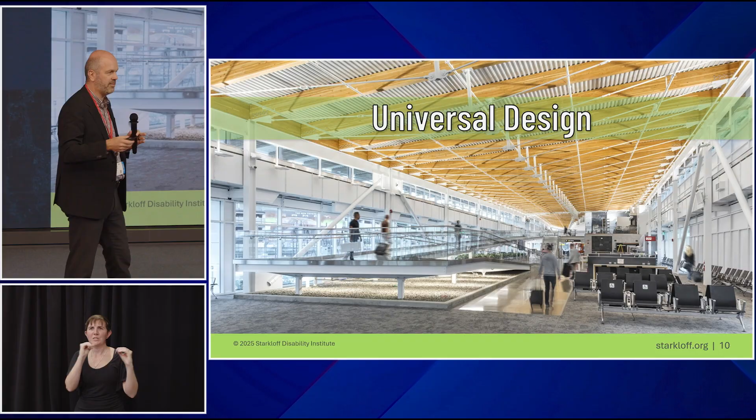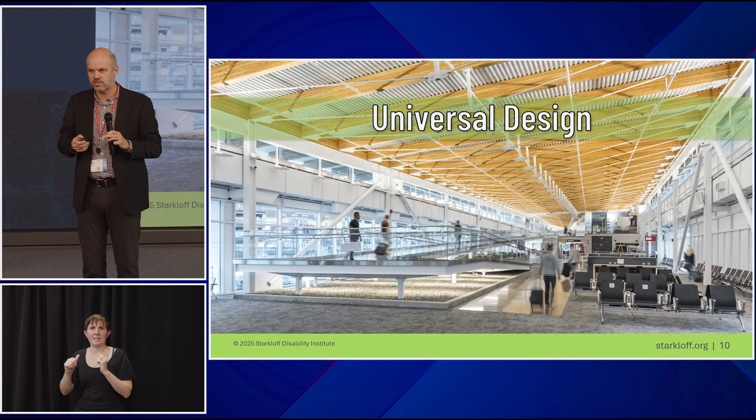But it feels a little bit like we're helping them by doing something extra. That's the bare minimum we want to do. So what we want to get to is universal design, where we treat everybody the same. There's no separate ramp for people to come into the building - there's a ramp that everybody can use. This is a project HOK did at SEATAC, the Seattle airport, and instead of putting in escalators and elevators, we just created this really long ramp with a very gentle slope that works for people with and without disabilities. Everybody is using the building the same way, everybody accesses it the same way.

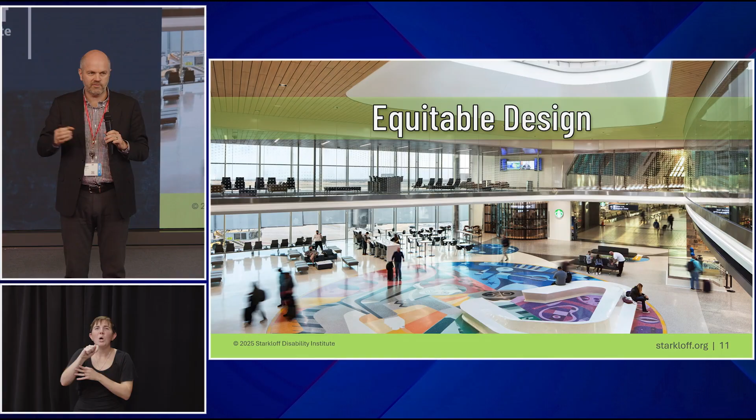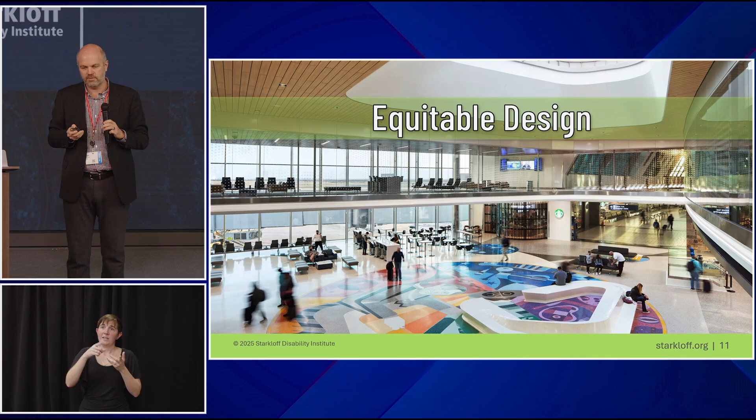And then finally, equitable design. Thinking about some of the disabilities or varieties of people that aren't necessarily noticeable, that aren't physical - we want to create spaces that are equally accessible for people from all backgrounds, abilities, and social and physical capabilities. This is an example where we'd use a variety of seating areas, colors, different levels of sensory input for people, so you can choose - you can use the building going through a quieter area, or through the middle with all that sensory input. Hopefully that puts universal design, and why we're here today, in perspective.

So neurodiversity is something HOK has spent quite a bit of time on. You may have heard Kay Sargent talk - she's got books out. It really applies to all sorts of building types. I'm thinking as an architect, so I'm focused on buildings, but you can obviously apply that to other forms of transportation, streetscapes, and things like that.

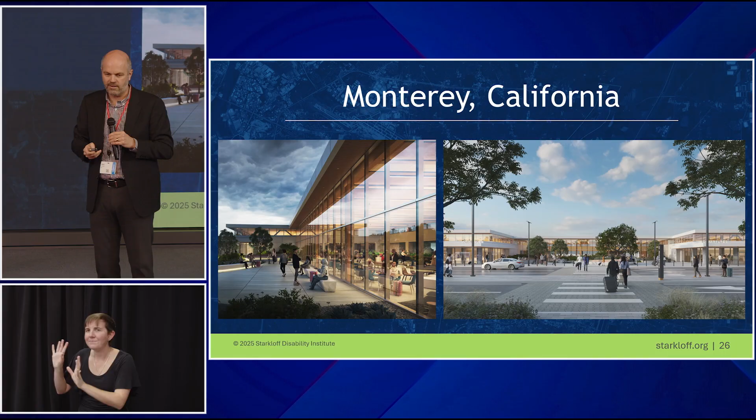There's only a curtain wall between the people that are on the land side, so haven't gone through security yet, might be waving their family goodbye, and the people that have already gone through security. So being able to come back and see your loved ones one more time before you get on the plane, that's great. We avoided any level changes, so no ups and downs, and integration of nature was very important both inside and outside, and we tried to extend that with mass timber in the building structure.

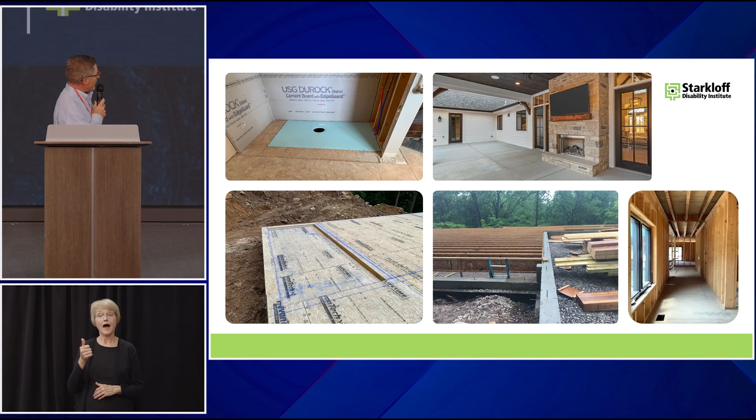Here's some other real world examples of the planning that goes into universal design. This bottom picture on the left, that's a subfloor, and when we're designing our homes, this is a zero entry shower, so we always drop the subfloor so that we can pour the sand and cement to create that shower and build it up even with the rest of the subfloor. Picture to the right of that, that's a perfect example of how we do zero entry at garages, at front doors. Basically, we pour the foundations taller so that the floor joists sit inside of the foundation wall. This allows us to pour the concrete slab up to the top of the foundation and even with your finished floor.

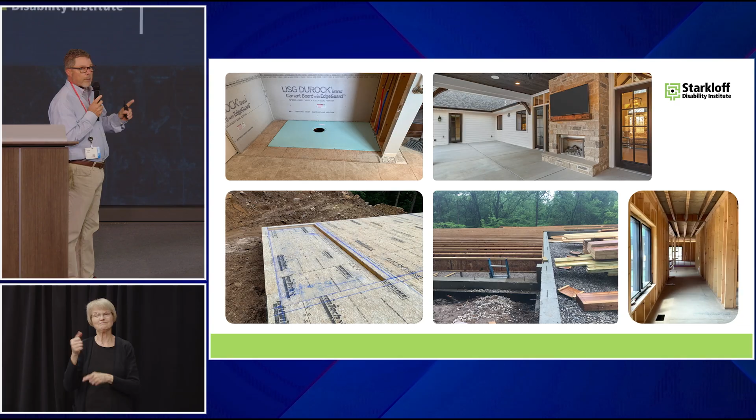To the right of that, just an example of a 4-foot hallway. Top right picture, great example of a rear patio. There's 3 doors there that all lead to the rear entertaining area, all zero entry. As a side note, Therma-Tru is a manufacturer of doors, and they make one of the best residential doors with ADA sills, so we try to use those as often as possible.

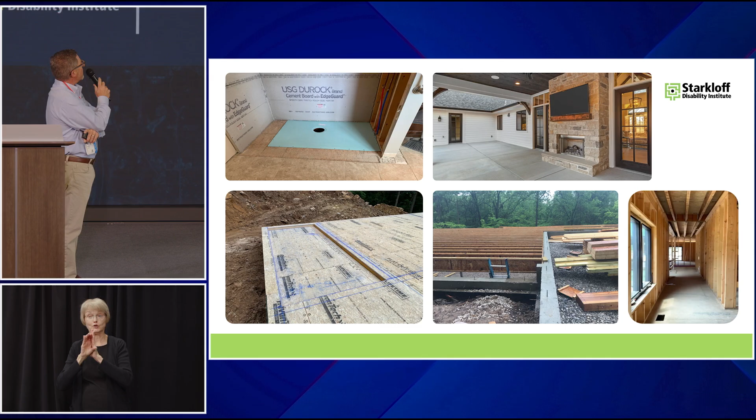And top left picture, this was just a small remodel, kitchen, bathroom, and all we did was the shower. So we didn't have the ability to drop the subfloor in this case, but there are products on the market that allow us to go in. We can take out the 3/4-inch thick plywood that's on top of the joist, and this preformed shower base sits right on top of the floor joist. We block around it, and then we can waterproof that and float that to create that zero entry shower.

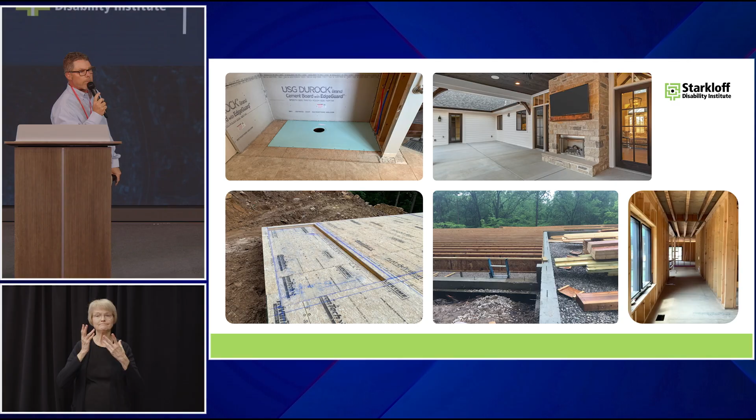Affordability and scalability. Affordability is a big topic in universal design, especially in the residential world. There's a lot of products out there that don't cost much more that are UD that we can use. Just some simple examples: lever handles versus doorknobs. A wider door is a couple dollars more than a narrower door. Taking a faucet in the bathroom or the kitchen and putting it off to the side of the sink instead of behind the sink - it's a simple move and it's much easier to access. Those are all good examples of not expensive items.

There are some items that are more expensive, such as the zero entry shower and zero entry doors where you're accessing from garage or front door where you're raising the foundation. But the whole point is you plan for it. So if you plan ahead and you do it up front, it's so much less expensive than when you have to do it at a later date.

Community impact - I want to touch on multi-generational and aging in place benefits. Multi-generational living has become very prominent for us anyway. We've done 2 multi-generational projects in the last 18 months, and we currently have one in design that is a 16-acre, 3-home multi-generational project. 3 families will be on this property. One of the gentlemen is in a wheelchair, he's paralyzed from the waist down, he's in a motorized chair, but he will be able to access every home, patios, front doors, garages of each home. We have paths going around the whole property that he'll be able to use. There's a pond on the property that he'll be able to get down to. So it's all about the planning to make this happen.

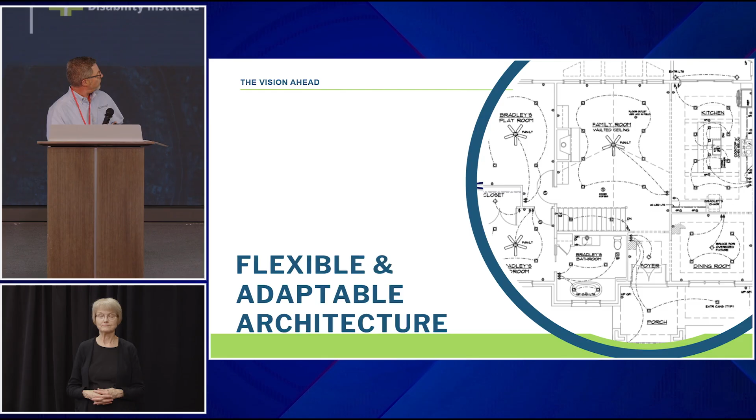Architects are designing flexible spaces, flex rooms, extra bedrooms that could be converted, or a dining room that could be converted for something else. I happened to be online today on Builder Magazine, and this is from today's Builder Magazine.

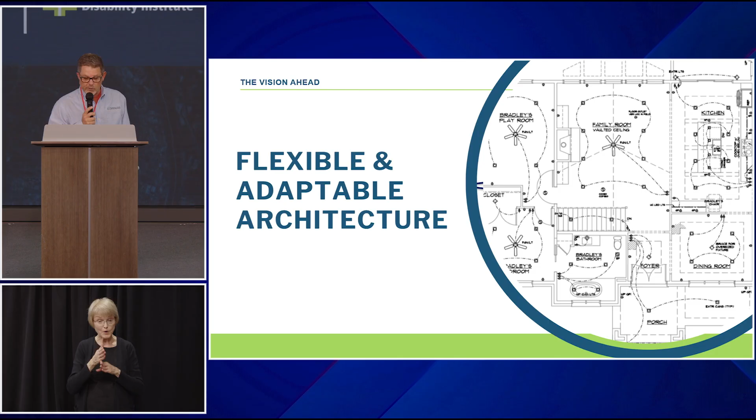Fewer bedrooms and dual primary suites. Bedrooms in new build floor plans are changing from count to configuration. Twenty years ago, about 75% of buyers wanted 4 bedrooms, 3 standard and 1 primary. Fast forward to today, and the majority, 55%, say they want 3 bedrooms, 2 primary bedrooms, and a standard bedroom. Having 2 primary suites is desirable for multi-generational and blended families or for long-term guests. So it's becoming a little bit more noticeable.

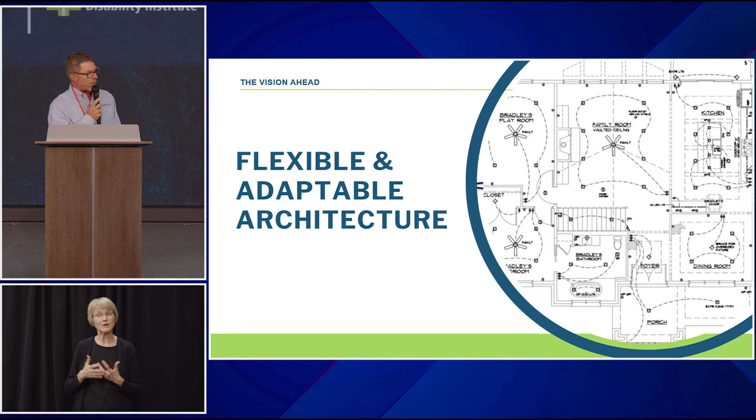Before I came today, I went on the IBS 2026 website. IBS is International Builder Show, that's in February of '26. It's a huge show for the home building industry. Unfortunately, there's only 3 speakers on universal design. But we just need to get out there, we need to continue promoting. We love Starkloff using their outreach to promote universal design and educate. Education is the biggest thing we can do.

Call to action. Builders and designers: integrate 1 or 2 small features in your next project. You'll find it's pretty simple once you just start learning a little bit about UD. Homeowners, as they're out looking at new homes they're looking to purchase, they can look at the home and get a feel for its adaptability for future use. Does it have a wide enough hallway? Are these doors big enough for a wheelchair?

Community leaders, that's the tough one. We need to educate them, get them to promote inclusive housing policies, maybe using tax incentives or some other idea. But in closing, we can start small, but we have to start now.

We get asked quite often about trends. What are the latest trends in home building, the latest colors and things? Well, universal design is not a trend. That's our future. Thank you.

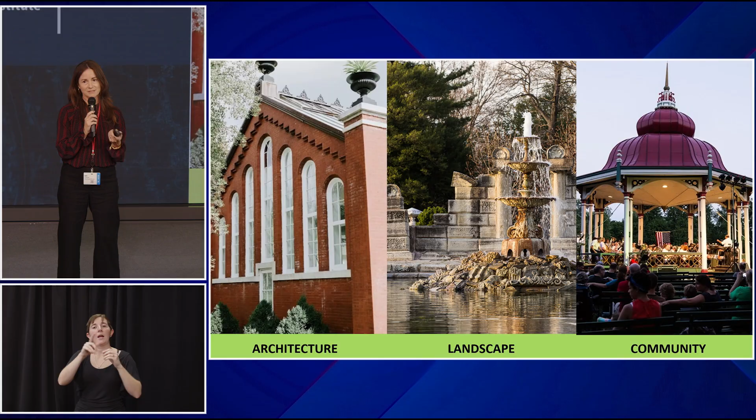I'm going to focus primarily on access and inclusivity. And then if we have a little bit of time, I'll touch on a couple details and the ways we're thinking about things, not on the broad scale, but down to every finite detail when it comes to universal design in the parks.

So first, access. This is a beautiful picture of one of, I think there are about 13 Victorian pavilions in Tower Grove Park. It is the world's greatest collection of Victorian pavilions anywhere in the world.

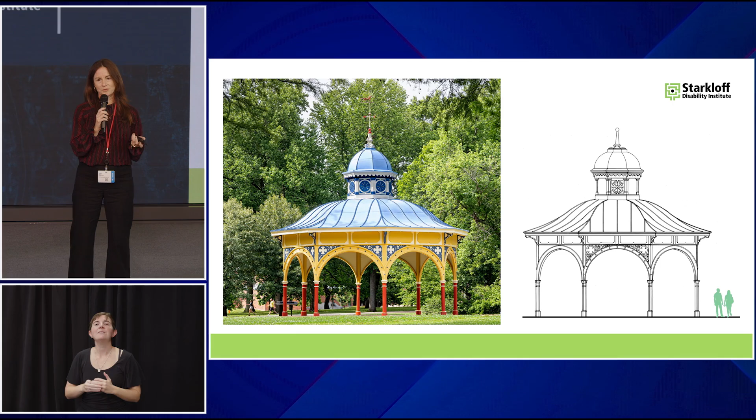So if you haven't been, you should check them out. We do have to focus on preservation when above grade, so we want it to look like it's always looked. We want to restore it to its original beauty. But at grade, we have a lot of ability to modernize, especially when it comes to accessibility and adaptability, and making sure everyone can experience these pavilions.

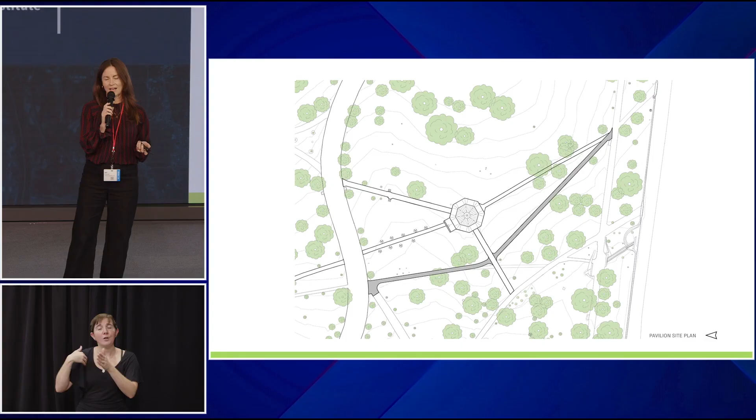So the first thing we look at is the paths. There are historic paths that we have to honor, but we also can add new paths. So we think about what is it like when you're at an event. Can you get to the pavilion for an event? And if there's an event happening, can you still enjoy your time in the park and get around it, maybe just looking at the pavilion? So we planned the paths.

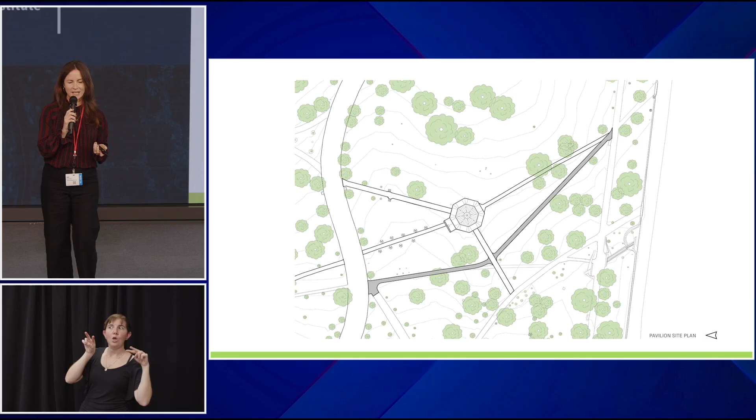So we worked with an accessibility consultant on our team. And with all of these projects, I should say, there's only money to do a couple at a time. So what we wanted to do with this project is set precedent for best practices in the park, how this can be implemented over time as the money is raised.

So we decided to go with an exposed aggregate pad at grade and extend it beyond the roof line of the pavilion. This allows people to get to the pavilion. There's new exposed aggregate paths also leading to the pavilion site, so now you can move around it, through it. We've aligned the tables in a way so that people in wheelchairs can pull up to the tables as well. In this case, we also added some lighting, which helps with safety and security and just general feeling of welcoming when you're at the park.

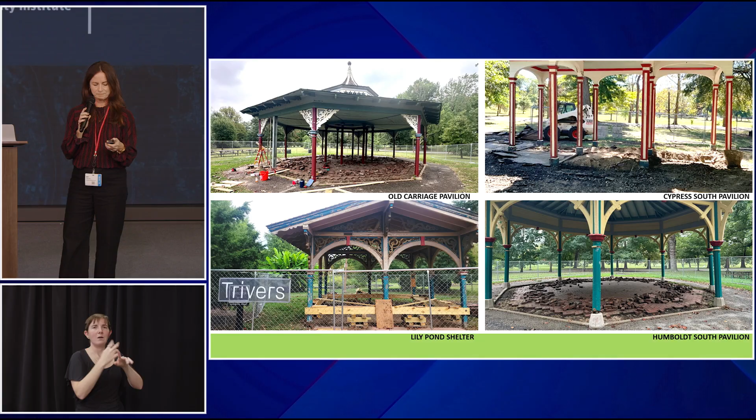So with the master plan, we partnered - Trivers and LJC worked on this - on really thinking about how people move to and through these spaces. Making sure that people can get to the lily ponds, that you can have spaces to sit and experience the landscape, the flowers, the trees, different ways to experience the site, and everyone can use the same paths. There's also an accessible bridge here, so you can even get over the water.

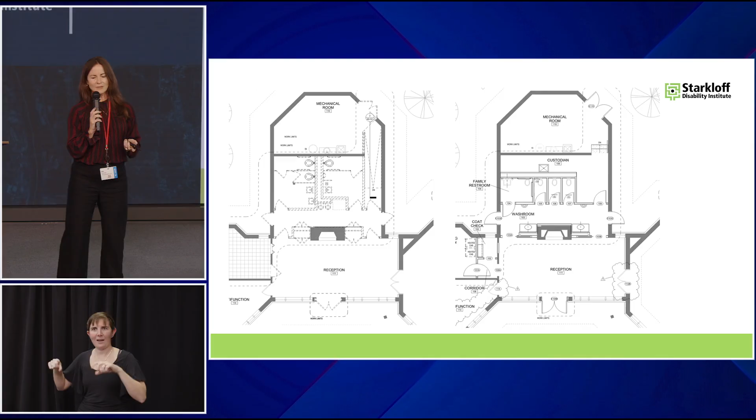So these are the floor plans, and I'm sharing these to point out that the exact same space, and actually less space, was used to create four gender-neutral restrooms versus the two men's and women's restrooms, because instead of having a corridor, now it's actually usable space with sinks and a mirror that everyone can use.

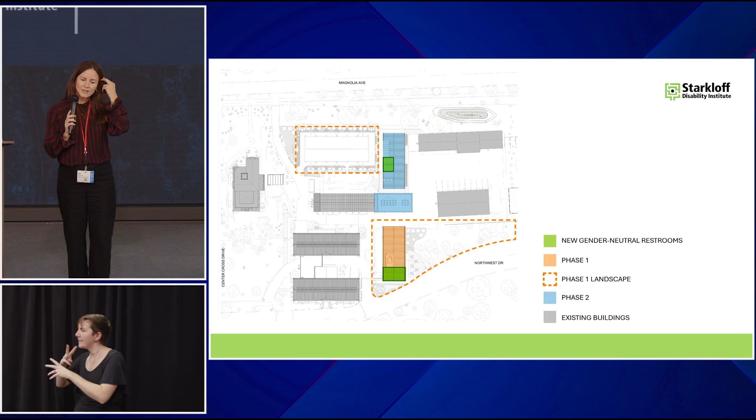So we are under construction in this area of the park as well. This is right at Center Cross, on the left side of the screen, and the Magnolia is on the top. So this is the kind of center area of the park with the two historic buildings shown in gray at the bottom of the screen.

In orange, these are the places that are under construction right now. We have a new event support building going in, and it will have new public gender-neutral restrooms. Restrooms are desperately needed in this area of the park. So we're really excited that the park is continuing the trend of using inclusive gender-neutral restrooms.

We are also implementing a new director's residence garden, shown in the top of the screen with the dashes. Then phase 2, which they're fundraising for right now and we hope will be under construction maybe in a year, is shown in blue. That's a new head house for the greenhouse, which does have zero entry, and then an operations support building. So again, making that garden space more usable, and it will have private gender-neutral restrooms for the private events.

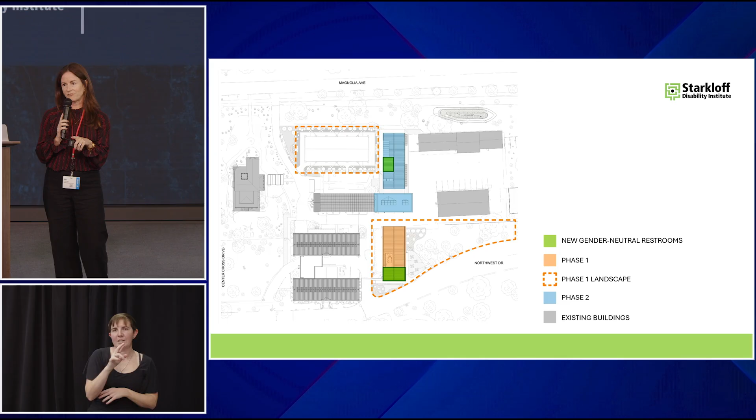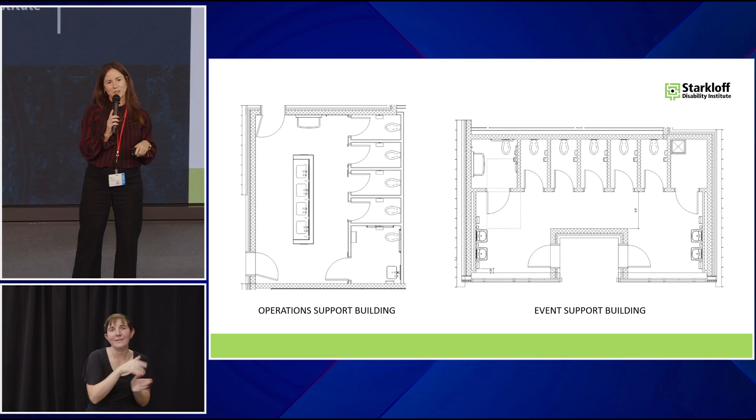And then just to share the differences between the two buildings and the gender-neutral restrooms: the event support building on the right is being constructed now. This is public, so it's built with CMU. We're going to paint it, it's going to be nice, but this is meant to be public restrooms in a public park. The operations support building, we were able to use a little bit nicer finishes because these will only be open during private events.

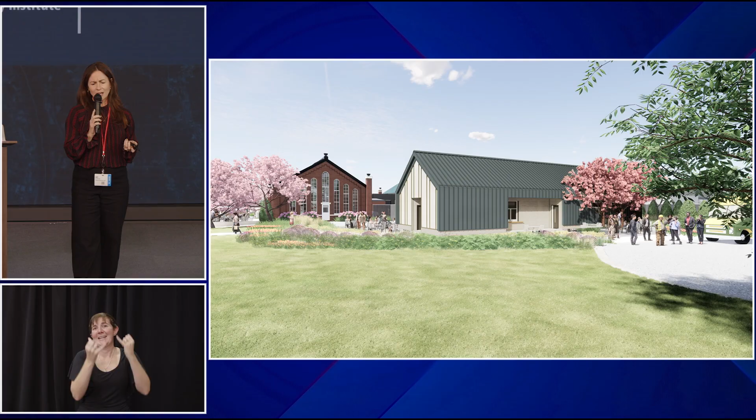So here's a rendering of the building that's under construction now. We're using translucent panels at the area where you can access the public restrooms. There's also a pop-up kitchen, so a coffee bar could go in there, or someone serving lunch with an accessible patio adjacent to where the food and beverages can be served.

And these are just some construction photos to show you that it really is happening. We've been working on it for a few years, so it's really exciting when the things you're working on finally are under construction.

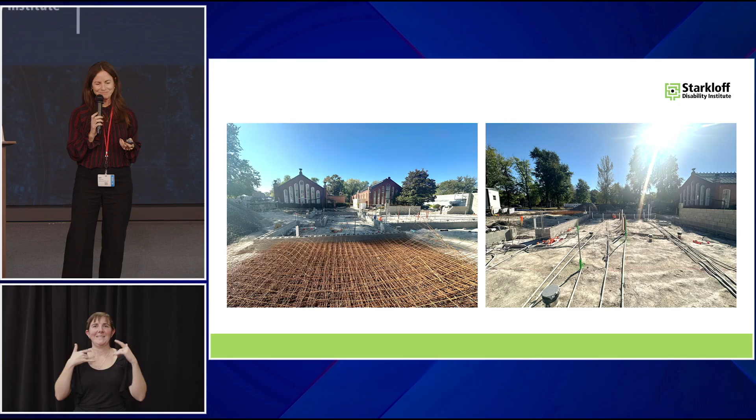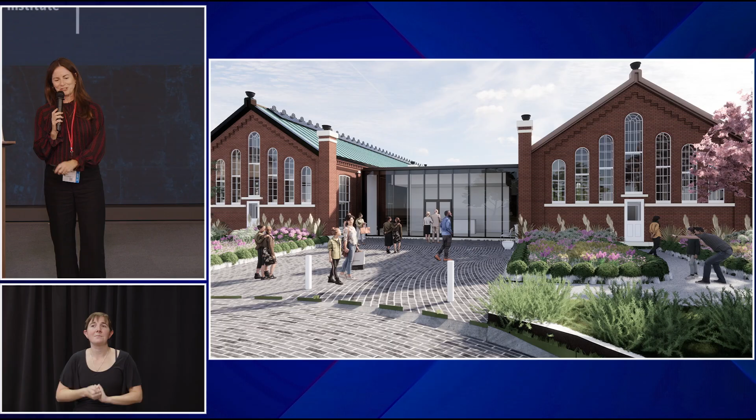And then far, far in the future, this is like phase 3. It doesn't even have a number yet, it's so far in the future. But this is the big vision, that there will be a new entrance, sort of like a visitor center between the two historic buildings, with a circle drive drop-off. Right now it's really hard if you're coming to the park to find a place to park or to get dropped off. So this is just another step in thinking about wayfinding and orientation and making people feel like they know where they need to go. This will be a new, very obvious kind of entrance for the park.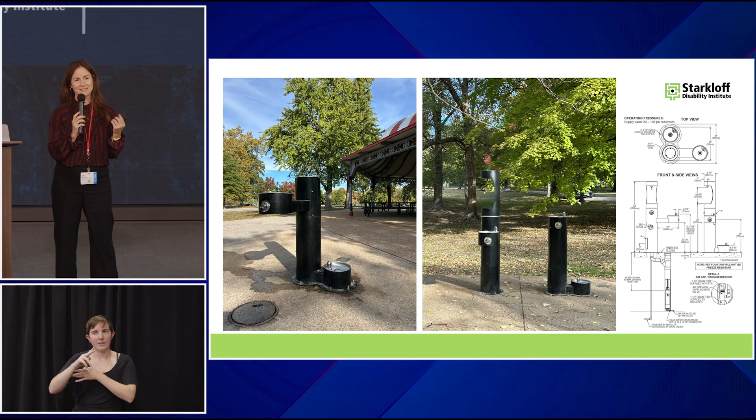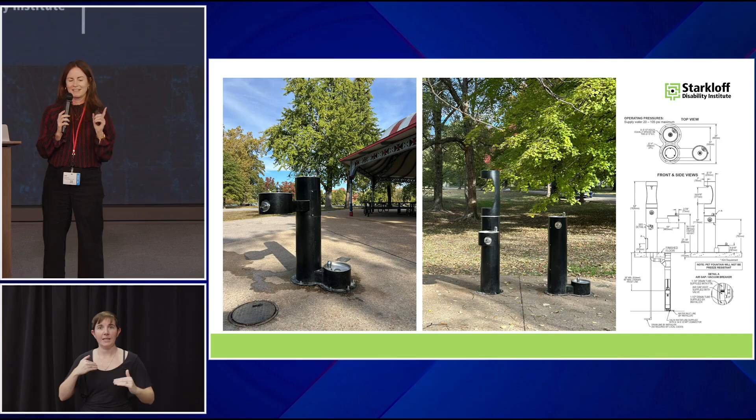And then just a couple real quick details. This is a drinking fountain. This is a National Historic Landmark Park, and I think we probably spent about 6 months trying to find the right drinking fountain for this park. It needs to not detract from the historic features, it needs to be simple, but most importantly, it had to be accessible because we're trying to find a basis of design that they can implement throughout the park. So we finally found this product that has an accessible height fountain. It has a bottle filler. It also has a doggy bowl, which is very important for park visitors.